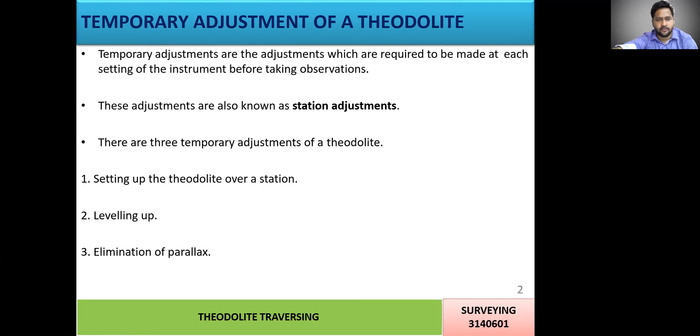There are three temporary adjustments. I will discuss them one by one. That is setting up the theodolite over a station, leveling up, and elimination of parallax errors. Setting up and centering: I will explain the setting up and centering of the instrument. That is the setting up.

First we need to place the tripod over the station. We need to take the tripod, open the legs of the tripod and place them on the ground at 60 degrees with the horizontal. Take out the instrument from the box and lift it. We take the theodolite from the box and place it on the tripod. There will be a screw on the tripod and a hole in the instrument, so fix that screw with the instrument on the top of the tripod.

After fixing, adjust the height. It should be level to the observer who is taking the observation on that particular instrument. Then suspend the plumb bob at the bottom of the theodolite so that your instrument will be centered. In modern theodolites, the shifting head is provided for easy and accurate setting of the instrument. The approximate leveling is done either with reference to a small circular bubble tube provided on the tribrach or by eye adjustment.

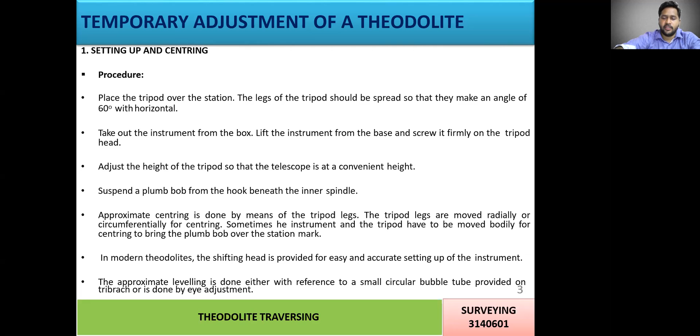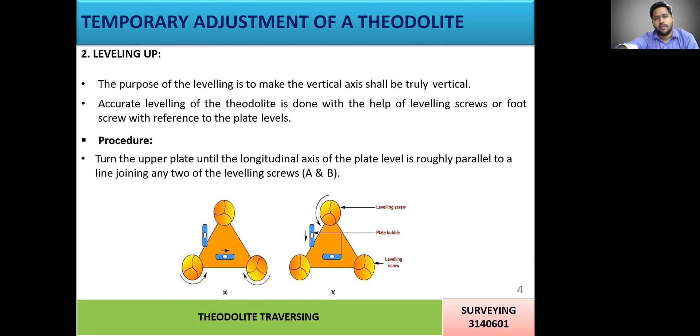Leveling up. How to do this leveling? There will be 3 leveling screws, and based on these 3 leveling screws we will do the leveling. We select any 2 foot screws and rotate them in clockwise or anti-clockwise direction until the spirit bubble comes to the center. This bubble is called the plate bubble. That plate bubble should come to the center, so we need to rotate the screws clockwise or anti-clockwise until it does.

Using these 2 leveling screws, then turn the upper plate through 90 degrees till the axis of the level passes over the third leveling screw C. Then turn that leveling screw until the bubble comes to the center. Rotate the upper plate 90 degrees back to the original position, and the 2 screws are considered again. We adjust these 2 screws so that the spirit bubble comes to the center. Okay.

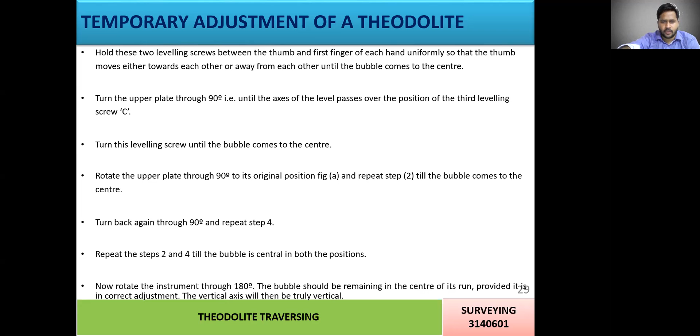Elimination of parallax errors. These are more important. Parallax is a condition arising when the image formed by the objective is not in the plane of the crosshairs. That means when you are seeing through the telescope, your object is not in the plane of your crosshairs, so we need to bring the object into that plane. That is nothing but elimination of parallax errors. Unless the parallax is eliminated, accurate sighting is not possible. Parallax can be eliminated in 2 steps: focusing of the eyepiece and focusing of the object glass.

How do we do this focusing of the eyepiece? The eyepiece is focused to make the crosshairs distinct and clear. Procedure: point the telescope to the sky and hold a piece of white paper in front of the telescope. First we focus the telescope to the sky and move the eyepiece in and out till a distinct, sharp black image of the crosshairs is seen. This confirms proper focusing. Focusing of the object glass: the object glass is focused to bring the image of the object into the plane of the crosshairs.

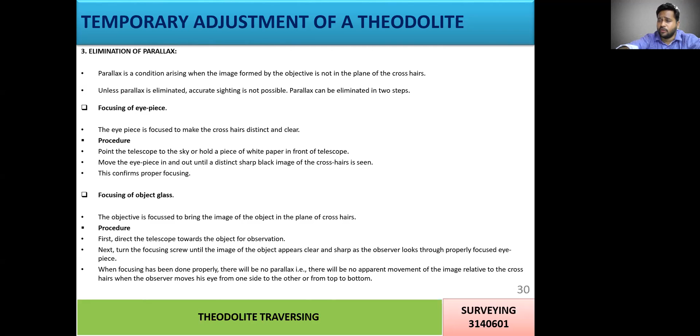So these are very important if you want to take measurements from the theodolite. Without elimination of these parallax errors, we can't take the measurements, or you can't focus the object you want to focus or read that particular reading.

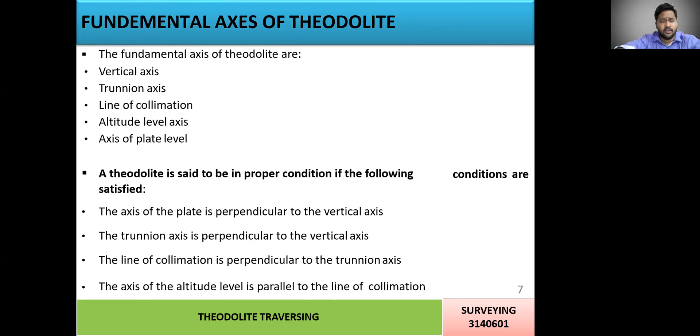Fundamental axes of theodolite. I told you already what the fundamental axes of theodolite are. The measurement of horizontal angle can be done by the general method, repetition method and reiteration method.

See, with any method, if you want to measure this particular angle, first we need to set up the instrument at station O. After fixing the instrument, focus station A with the telescope. After focusing station A, release the upper clamp so that your lower clamp will be fixed and the upper clamp will be released, so that the upper plate will rotate.

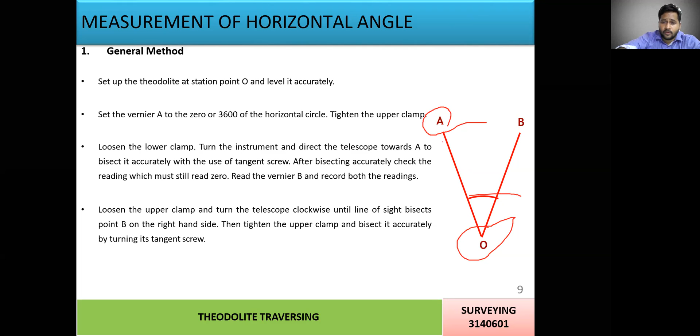So your lower clamp is fixed. So your angle is 0 and it will show this angle. That is called measuring the general angle. Okay. So here that is called the general method. The method where we measure angle AOB, how you measure that angle, is called the general method.

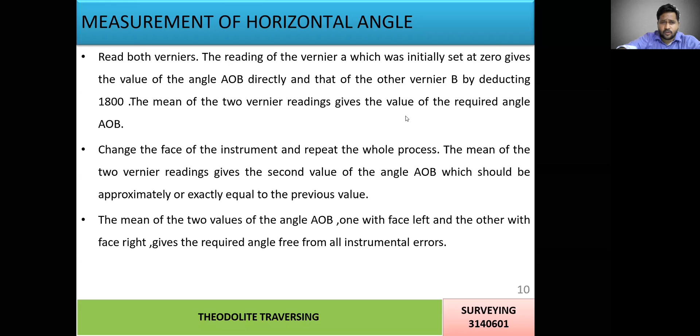Repetition method. In the repetition method, we are continuously measuring that particular angle. For accuracy of that horizontal angle, we fix the theodolite at station O and focus at station A. We fix the lower clamp, release the upper clamp, then rotate the telescope and focus station B.

After sighting station B, you can read the reading from vernier A as well as vernier B. There will be 2 openings on the top of the horizontal circle. We can measure the horizontal angle in that reading. After measuring, note down that angle, that is angle AOB.

Then this angle AOB we can repeat and measure one more time, and again one more time. Like that, we need to take at least 5 measurements. After taking those 5 measurements, the average of all angles gives you the accurate angle. That is called the repetition method.

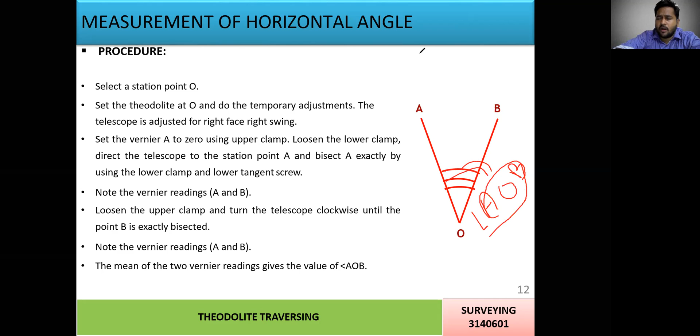Reiteration method. The reiteration method of measuring horizontal angles with high precision is less tedious and generally preferred when several angles are to be measured at the station. Several angles are measured successively and finally the horizon is closed. Closing the horizon is the process of measuring angles around a point to obtain a check that their sum equals 360 degrees.

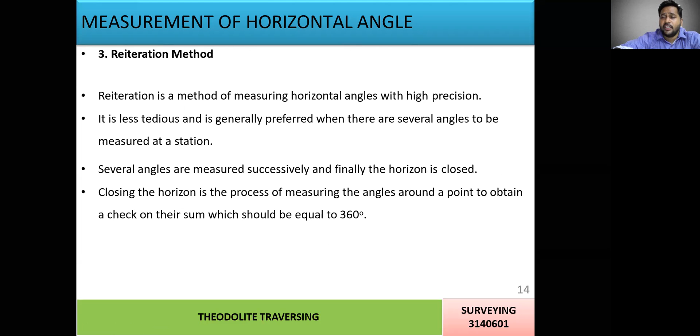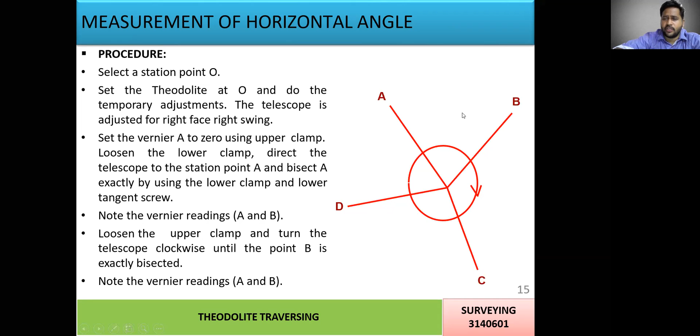See, we'll fix the instrument at this point and take observations at A, B, C and D, and after taking all the angles we should get a total of 360 degrees. So that is called the reiteration method. These methods are very useful for measuring horizontal angles.